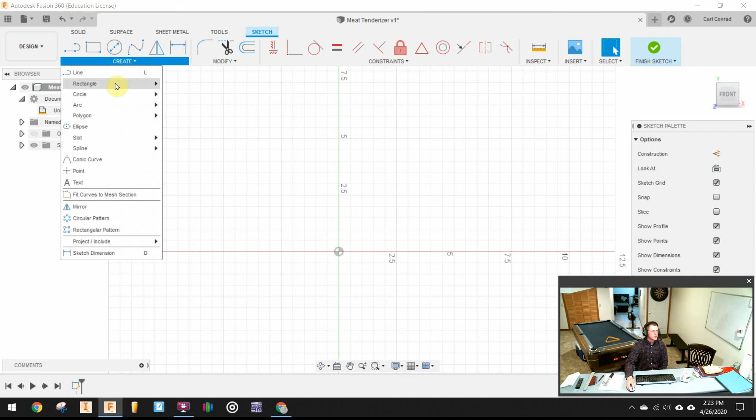Let's start with a sketch on the front face, and let's do a center point rectangle, and the sides of the rectangle need to be 1.875 inches. So I'm going to go ahead and just dimension one side and make them equal so that I have a square. I'll finish my sketch.

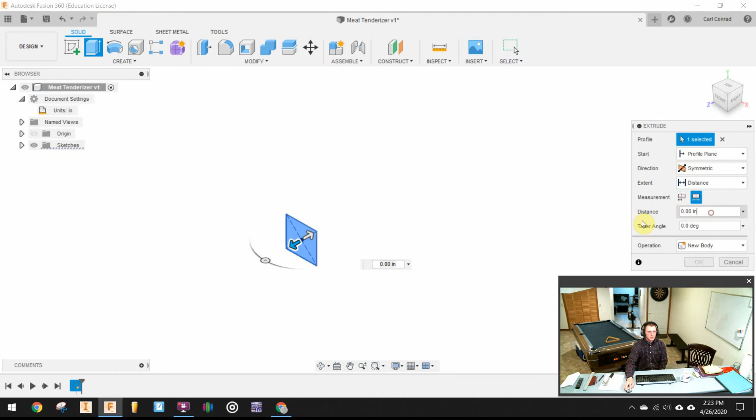I want to do a symmetric extrusion where the whole length will be a distance of 2.375 inches.

Next, I'm going to do a sketch on the right side face. So I'm going to select that. Then let's find the 3-point arc tool. And I'm just going to kind of eyeball 2 points on the end, something like that.

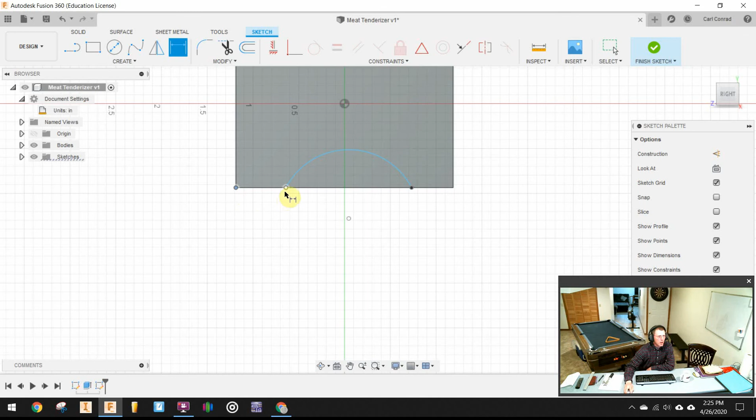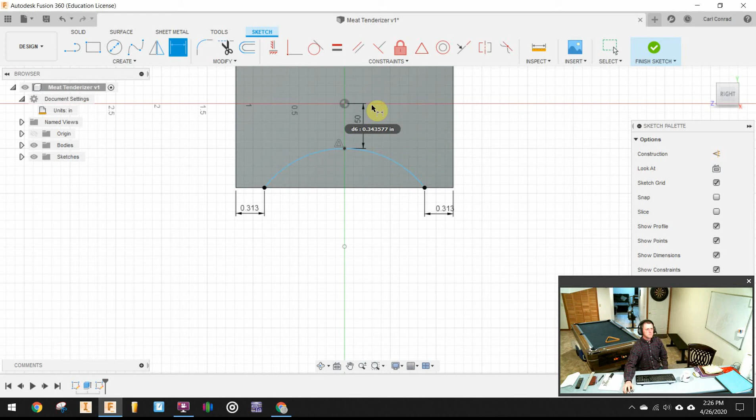And let's dimension. From the end of the block to the end of the arcs is going to be 5/16 of an inch. So we'll put that on both of those. And then let's create a point, a midpoint on the arc. And the distance from the origin to the midpoint of the arc is 1/2 inch. Okay, that looks pretty good.

Finish the sketch. Let's do a cut extrude, distance all. And the reason why I wanted that in the very origin is that will now allow me to pattern that cut with a circular pattern.

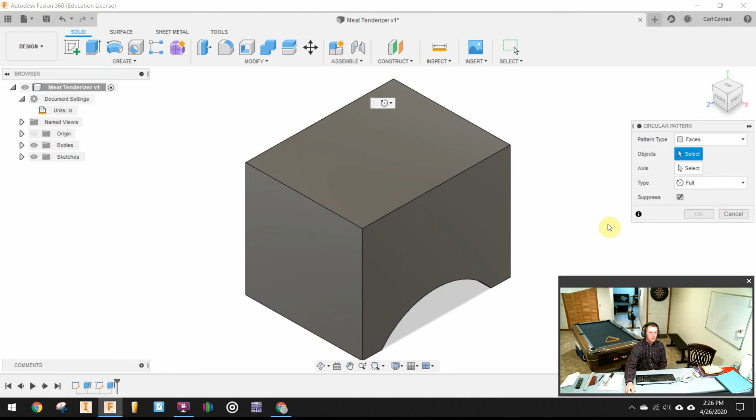So I will first select the face I want to pattern. And then the axis, I'll expand my origin and select the z-axis. And I want not 3, but 4 of them. There we go. So there's the start of our meat tenderizer.

Next, let's start modeling the handle. So let's start with constructing an offset work plane, and let's come out a distance of 4 inches. Put a sketch on that plane.

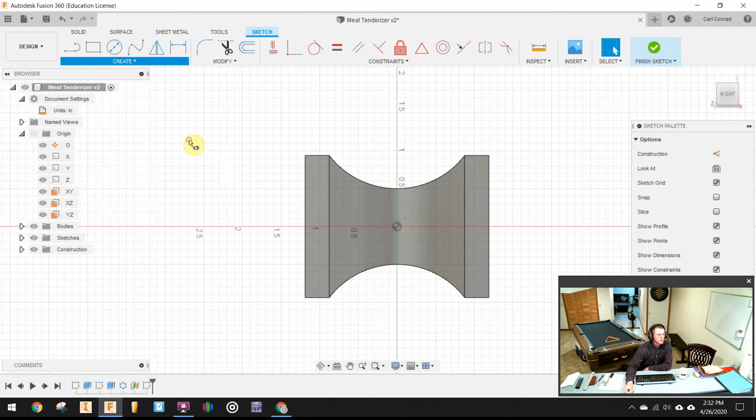And then let's find the slotting tool. And let's see, I'm going to choose the center to center slot. You can actually choose whichever one you want to and still get there. And let's just kind of eyeball that. I put it off the origin on purpose for now.

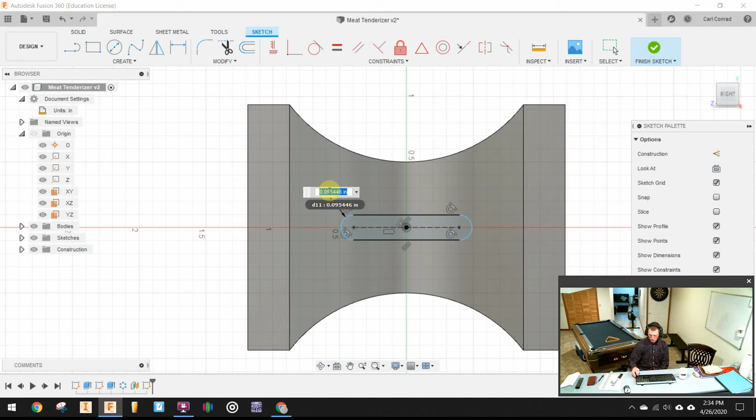I'm going to create a point at the middle of there on that construction line and make that coincident and put it on the origin. Let's make that radius 0.15, and then let's make the distance between the two centers a distance of 0.375. Okay, that looks pretty good. We'll go ahead and finish the sketch.

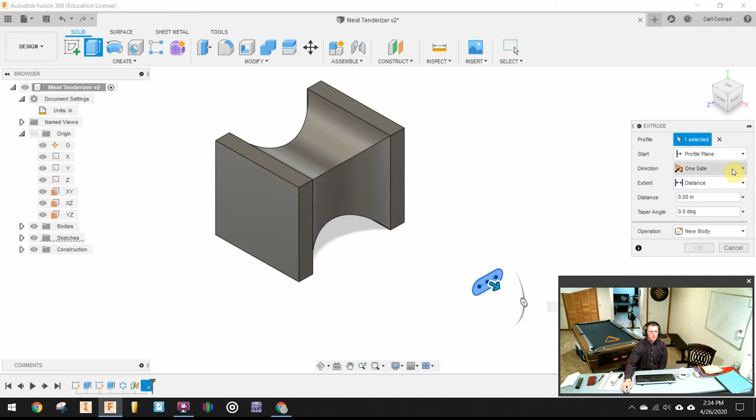And then let's do an extrude. And instead of telling it a distance, we'll go ahead and extrude to the object and pick the object we want to extrude to, and there's the start of the handle.

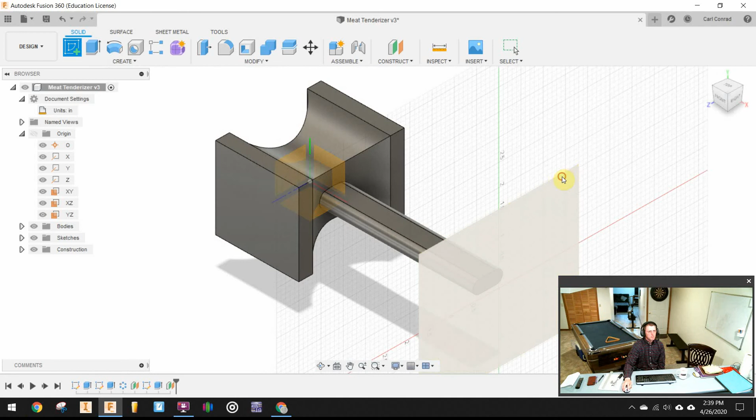Next, let's do an offset work plane off the end of that, 1/4 inch. Let's put a sketch on that surface. And then I want to use an ellipse tool here. If you don't have an ellipse tool, you can use a slot tool again.

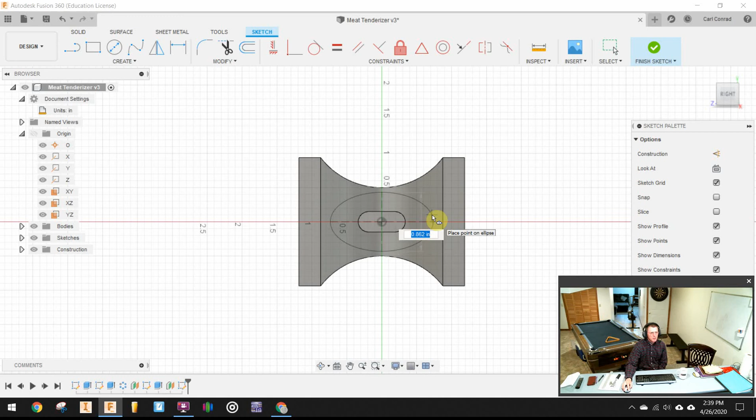And I'm just going to kind of eyeball this because looking at it, that handle gets pretty big, but not that big. So I've just kind of eyeballed that, something like that, to where I guess I could put some dimensions on there if I put midpoints on there. How about 0.45 inches? And then the other distance here, about 0.75 inches.

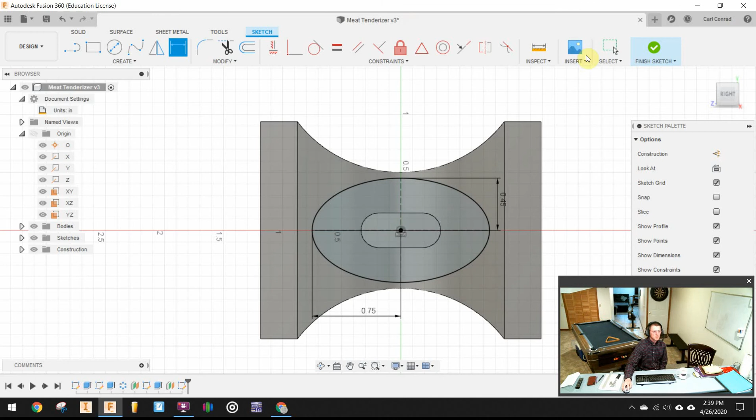Okay, I'll finish my sketch. Again, if you don't have the elliptical tool, just use a center point slot again and try to do your best with that piece of this build.

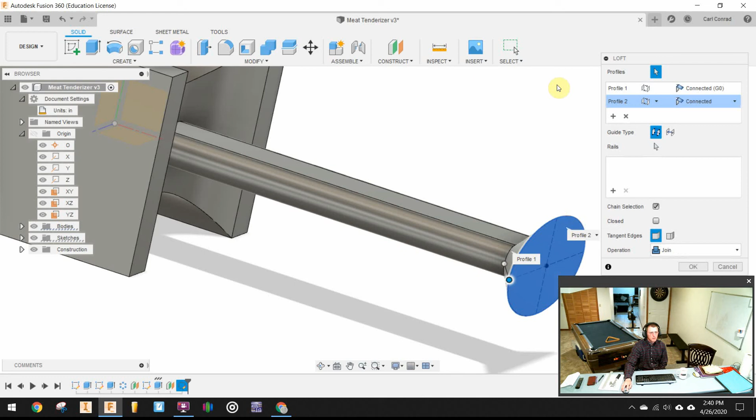So then we want to loft between those two shapes. So let's first select the profile, click the plus sign to add an additional profile, and say OK. So that's getting the meat tenderizer where it flares out.

And then we can just extrude that face an additional 4 inches. Make sure that's a join. So there's kind of your hammer handle for your meat tenderizer.

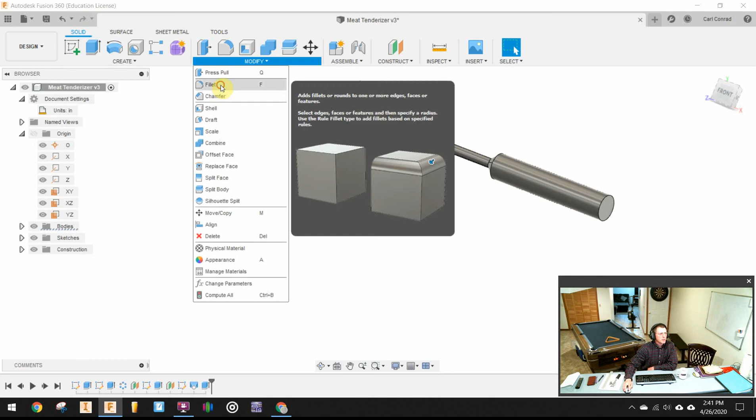And then let's add a fillet on the end of that. Because it does round it off quite a bit. Let's try 0.375 inches. And if that doesn't quite work based on the numbers you did, just use whatever size fillet you can.

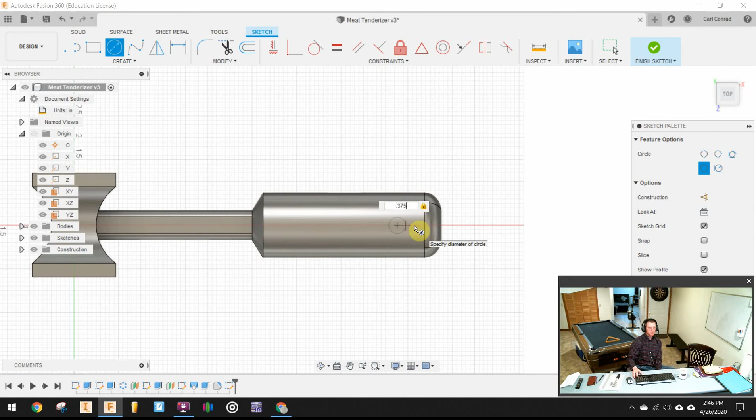Okay, next let's put a sketch on the ground plane so that we're going to be able to extrude a circle through the handle. So I'm just going to draw a circle and let's dimension it at 0.375 inches. And let's dimension that distance back to the origin at, how about 7.5 inches? See how that looks. Okay.

Let's also make sure that that's horizontal with the origin, so it's in the middle of the handle. Finish the sketch.

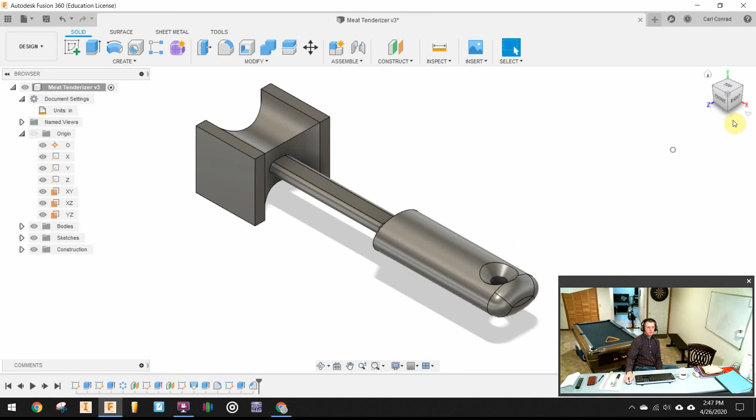And then we can do an extrude. It's going to need to be symmetrical and distance all, so it's going to cut all the way through the part. Then let's add a chamfer to that edge - pick that edge and let's go with a 1/4 inch. That looks pretty good. Do the same thing on the other side.

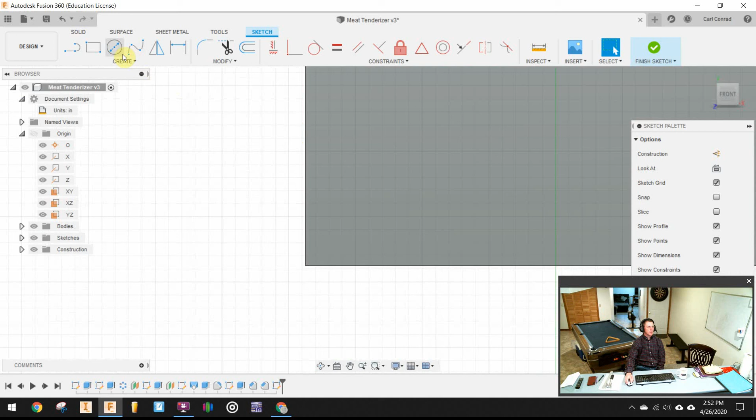Now for the fun part, back to the business end of the meat tenderizer. Let's select one of those faces that's square and put a sketch on it. Let's get some good eyes and zoom in, and let's just put a rectangle on there.

We're going to need to make it a square, and we want the dimensions to be 5/32 of an inch. To make it simple, I'm going to go ahead and make those two equal to each other.

The distance to the side of the meat tenderizer then is going to be 1/16 of an inch, and that'll be the distance from both the side and from the bottom edge. Okay, finish the sketch. So there's the first part.

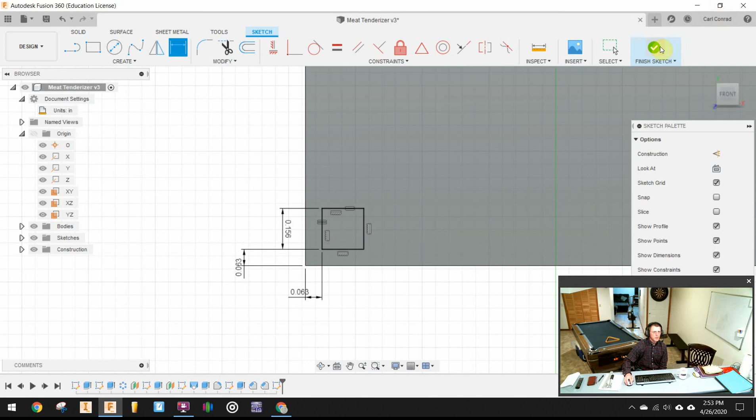Okay, next we're going to do an offset plane from that face, and we're going to come out 1/8 of an inch.

We'll put a sketch on that face, and I want to project 2 of those edges. I don't have to project them all, but let's project 2 of those edges from the previous square, and add midpoints to those edges.

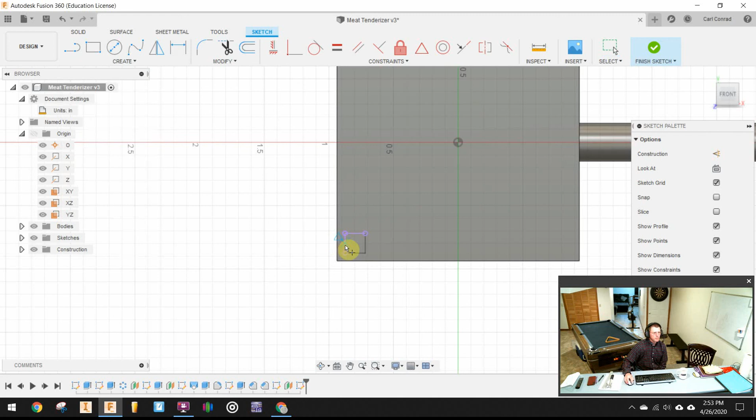And then we're going to go in and draw another square inside of the first one. Now I'm not going to dimension it at first - I want to get it centered and then dimension it, because this other square is going to be pretty small.

So then let's add some midpoints, and in order to center it, let's use horizontal and vertical constraints. So that'll jump into place and now it's centered.

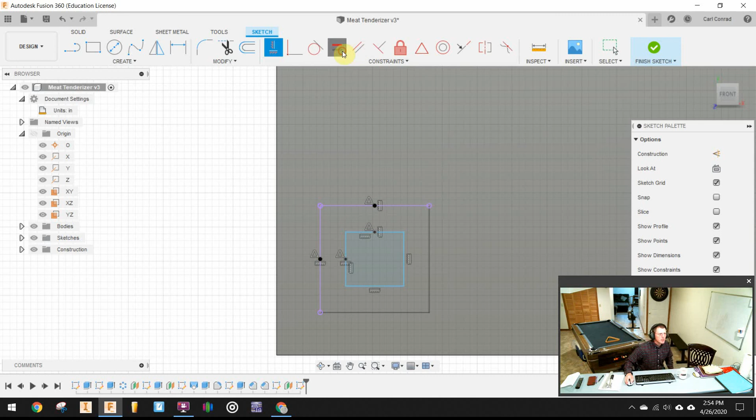Let's make the sides of that square equal to each other so it's not just a rectangle, and then let's put one dimension on it that is a dimension of 1/64 of an inch. That's why I didn't want to put that dimension on right away, because it gets kind of small. So then we'll go ahead and finish the sketch.

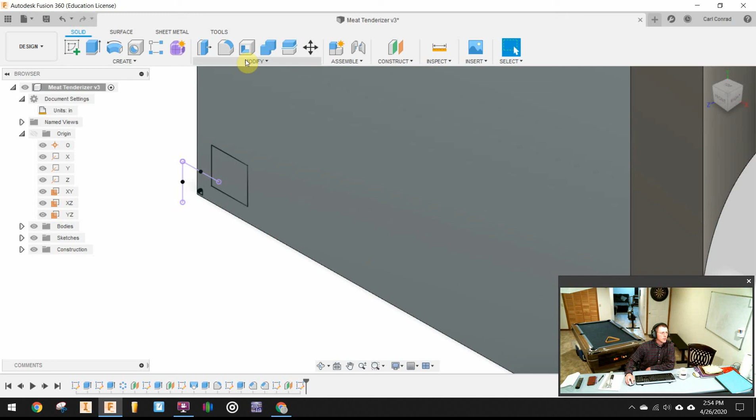So what this is going to give us when we loft it is a truncated pyramid. So we'll go into Create, pick the Loft tool, pick a square, click the plus sign to zoom in and get that next square, and make sure that's a join. And then I have, at this point, 1 pyramid for my meat tenderizer.

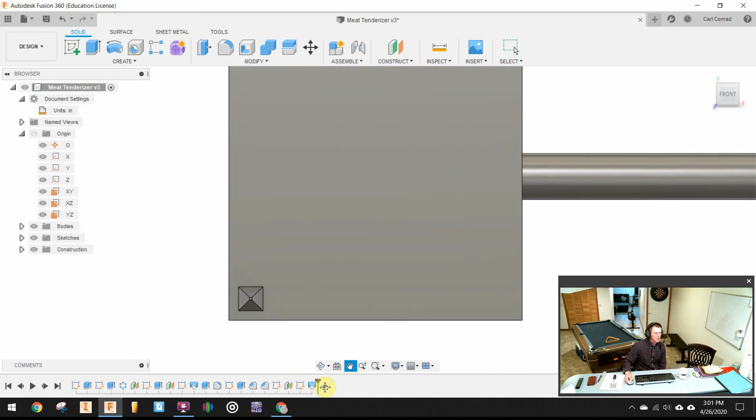Next, we'll go ahead and pattern that. So let's look at this pyramid that's truncated head on, get some good eyes. Go to Create, select Rectangular Pattern. And we first are going to pick all 5 of those faces from the Truncated Pyramid.

Next, you need to select the direction. So I'm going to just pick an edge with my selection arrow, select an edge, and that's going the wrong way. So I can just flip it.

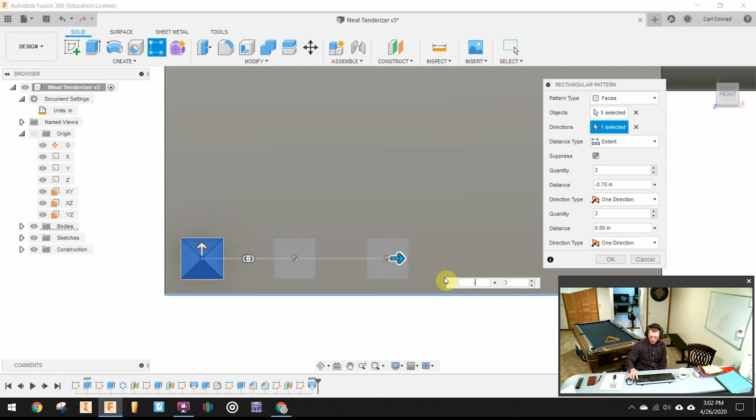I want the distance to be 1.6 inches, or negative 1.6 inches, whatever it needs to be for your particular part, and I want 8 of them. And then I need to do the same thing.

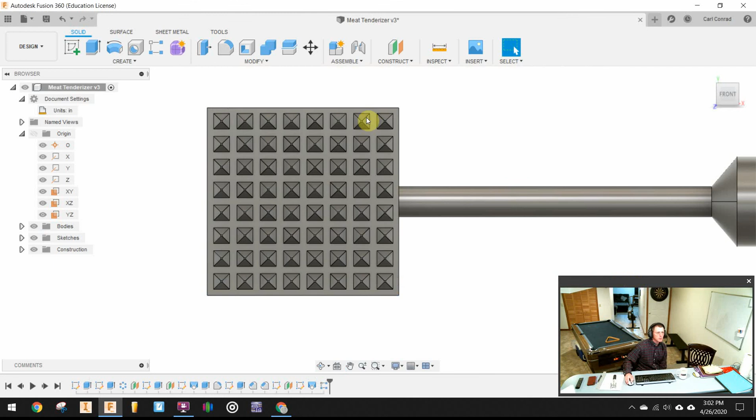I'll select a second direction. I need 8 in the other direction, and a distance of 1.6 or negative 1.6, depending upon how your origin was selected for your rectangular pattern. So as you can see, that totally covers up the business end of the meat tenderizer.

And finally, let's clean this up with some fillets. So let's first add a fillet to the end part where the handle attaches to the hammer section, and let's make that 1/4 inch in size. Say OK.

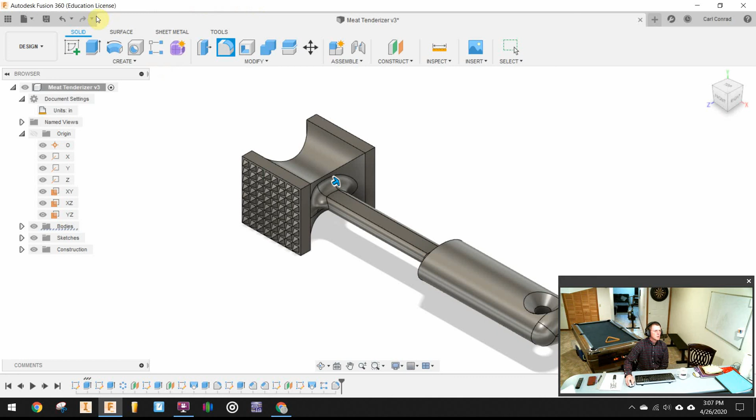The 8 corners need to be 3/16 of an inch in size. So let's go ahead and select all of those. We might have to rotate this around to get the other corners. So 3/16 of an inch. And go ahead and apply that.